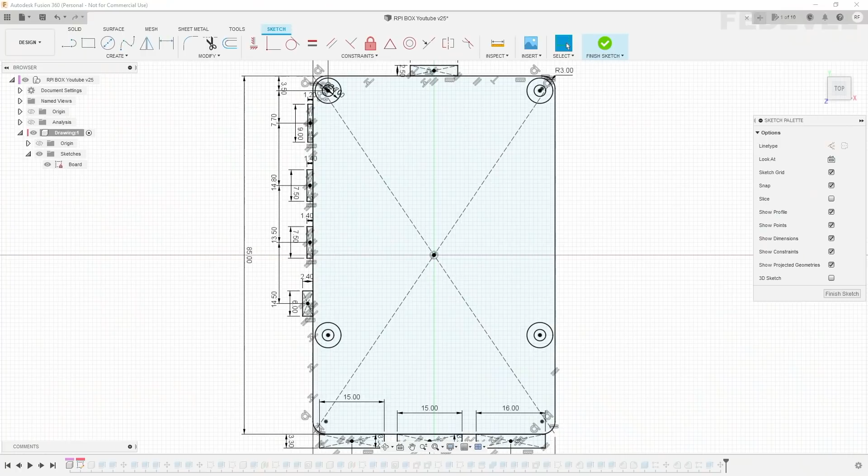After watching this video, you will know how to design and 3D print a box for your own board. As an example, we will be designing a box for a Raspberry Pi. First, we will create a drawing with board dimensions and connector positions. Then we will create a very simple 3D model of our board, and based on this model, we will create our box with openings for the connectors. At the end, we will 3D print the box and mount the board inside. I really hope you find it useful, and here is the video.

Before we start, we need to search for Raspberry Pi mechanical drawing so we can get the accurate position of the mounting holes and connectors. Then open Fusion 360, go to Inspect, and click on the component color cycling toggle. You don't have to do this, but I'm using it in the video, and basically what it does is assign different colors to different components we will be creating.

We are going to create a new component, right click, new component. I'm going to call it drawing. Now open the origin. Be sure the new drawing is selected - there has to be this dot.

Click on Create Sketch. Select X and Y, left click, go to Create, Rectangle, Center Rectangle, left click. Write the dimensions, 56, tap, 85, enter. I'm going to zoom and save our new project. Click on Save - I'm going to call it RPI Box YouTube.

Save. We are going to create rounded corners. Left click, left click, left click, 3. Left click several more times, enter.

We are going to add mounting holes. Left click on Create, Circle, Center. Left click somewhere here, write 2.7, enter. Use the Dimension tool, left click, click on Center, left click - this is supposed to be 3.5 millimeter, and from here to here we would like 3.5 millimeter. Create, circle, center, left click, write 6, enter.

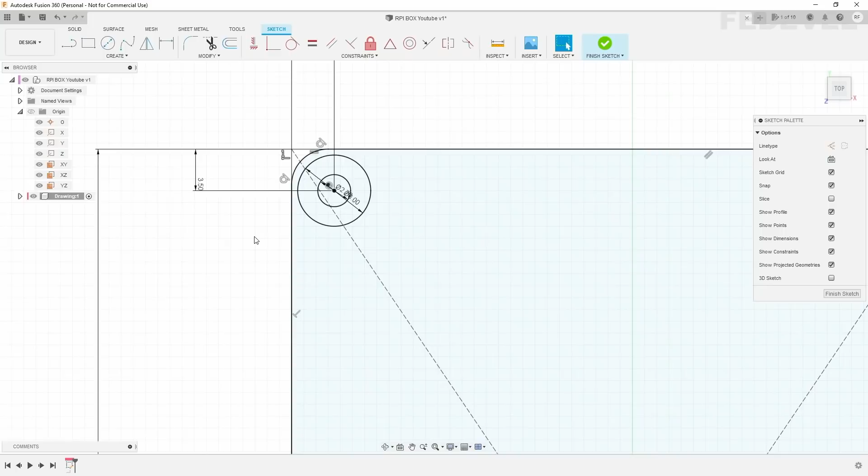Click on Create, rectangular pattern. Select the circles, left click, press Ctrl, left click. We would like to select directions, left click, press Ctrl, left click - now you can see these arrows pointing this way and this way. Select spacing - we would like 2 this direction and 2 this direction. Here is going to be 49 millimeters, and here is the distance 58 millimeters.

We are going to add information about the connectors. Click on Create, Rectangle, Center, Zoom, left click, write 15, tap, 3.3, enter. Create, Rectangle, Center - next one is going to be exactly the same, 15, tap, 3.3, enter. The last one is going to be a little different - write 16 by 3.3, enter.

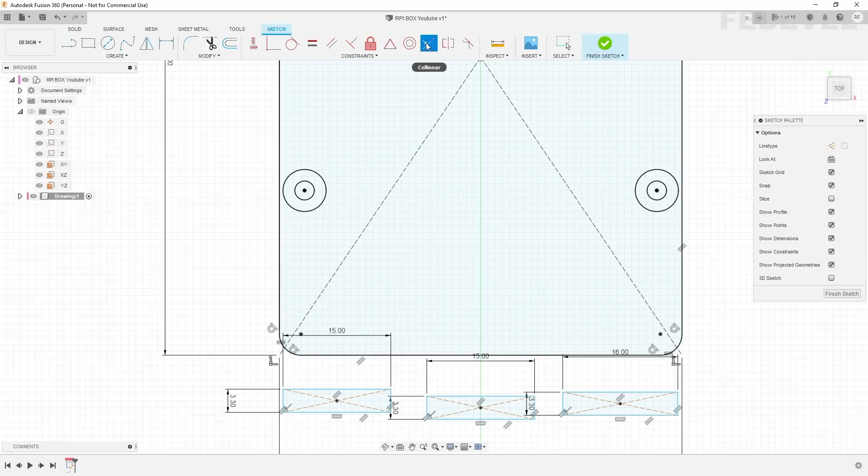Now we are going to use this collinear feature, left click - it will help us place this edge of these connectors on this line which is here. Once active, left click on this line and then left click on this edge. Line, edge. Use Dimension tool, click on the center, left click - this should be 9 millimeters. Left click, 9, enter.

From here to here, we would like to use 27. Left click, 27, enter. And the last one, from here to here, it's supposed to be 45.75, enter.

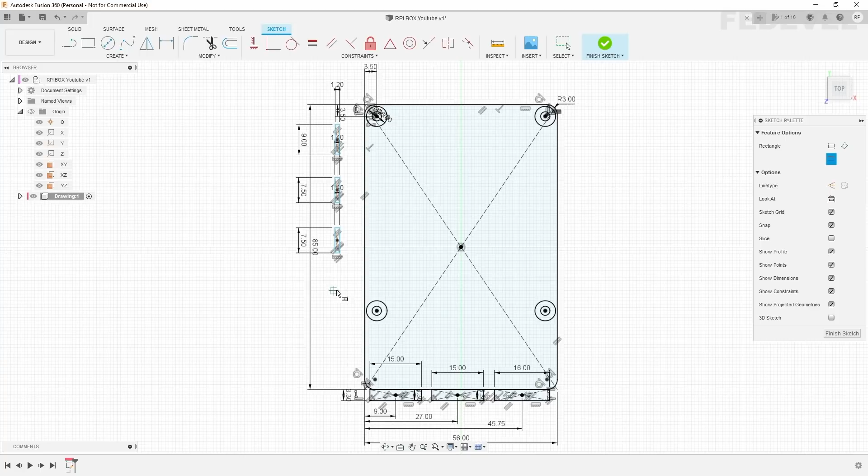We are going to add more connectors. Click on create, rectangle center, left click, 1.2 by 9. The next one is going to be 1.4 by 7.5. And the last one is 2.4 by 6. Use the collinear feature or constraint.

Left click several times to apply the collinear constraint, and use the dimension tool. From here to here, we would like 7.2. Left click, 7.2, enter. Now from here to here, there should be 14.8. From here to here, 13.5, and from here to here, we would like 14.5.

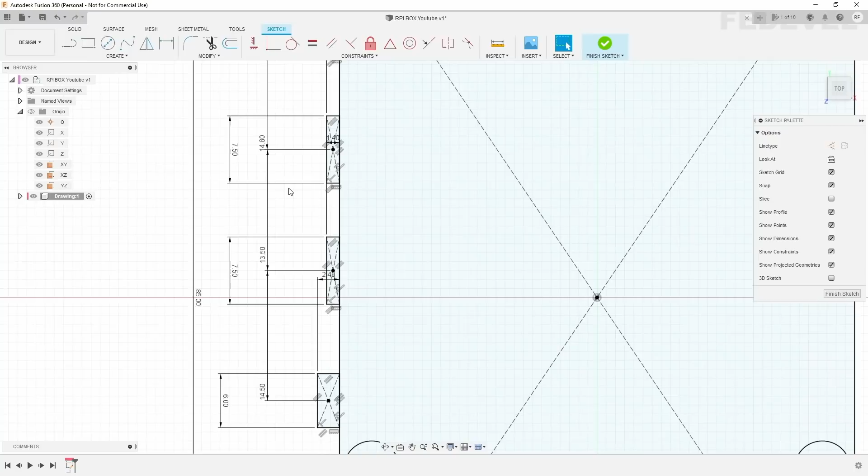Okay, escape. If you like, you can play with these dimensions and put them into nicer positions, but it's not really necessary - though it may look a little bit nicer.

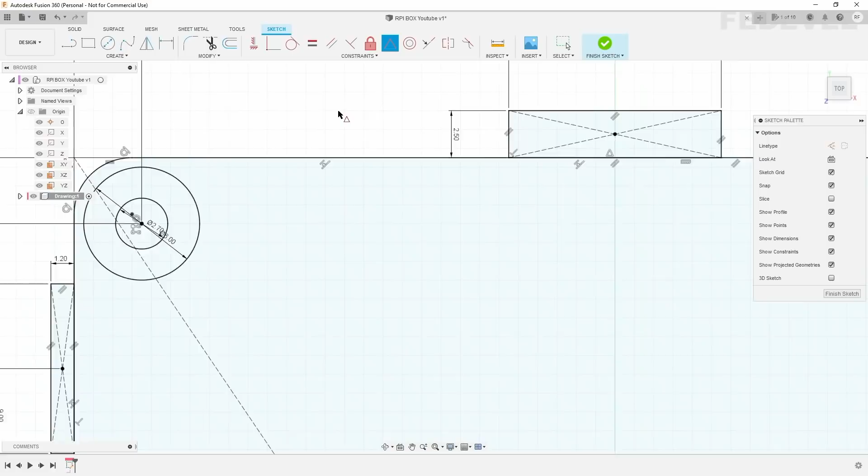And the last is the SD card. Create rectangle, left click, 11 by 2.5, enter. We would like to place this edge on the edge of the PCB, and also place it into the center of our board. So click on constraint, use midpoint - first be sure you highlight only the edge of the rectangle, left click. Now we would like to place the middle point of this rectangle into the middle point of this edge of the PCB - also left click on the edge of the PCB, escape, and our drawing is finished.

Click on finish sketch, save our project, create new component, call it board - we are going to create a very simple 3D model of our board. Be sure it is active - when it's not active, you can just hover the cursor over the component and left click into the circle. We are going to use the drawing to create our board, so left click - we would like to also select these circles, press Ctrl, left click, only leave the hole empty, okay?

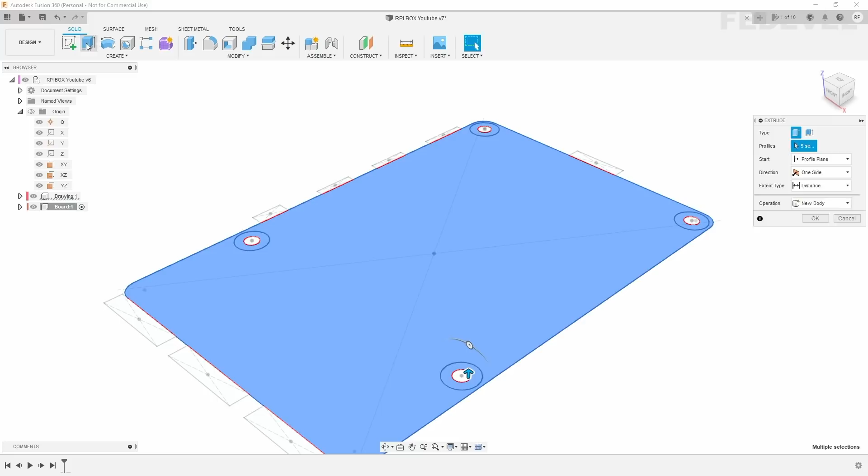Find where it is black, like this, and left click. Still press Ctrl, left click. Now use this extrude feature and simply write -1.5, enter.

Make the drawing visible. Go and select this, use extrude by 1 millimeter, use move command, select this and put it down by -3 millimeters. I'm going to call this SD. This is going to help us find where we need to create an opening in our enclosure for the SD card. And this I'm going to call PCB.

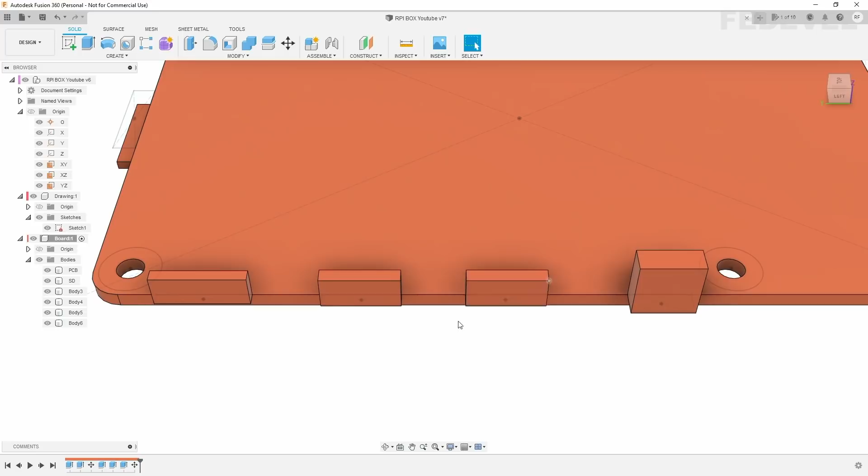We are going to do the same with the other connectors. Select 3, 4, 5, 6, use move command, and put it down by -0.1. I'm going to call this one USB.

This one is HDMI 1. HDMI 2, audio.

Very similar with these. Select, put it up, 15, select this one, 13.5, and move all of them up by 0.4 millimeter. I'm going to call this one USB 2. This one is going to be USB 3. And this one is Ethernet.

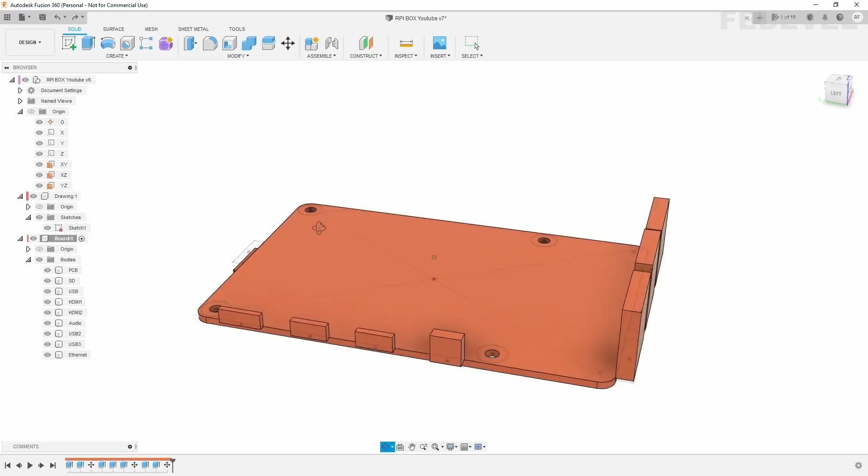Only what's left is to adjust the shape of the audio connector. Click on Sketch, left click on the surface, create project, left click on the square. We would like to project the edges of the square on our sketch so we can work with them. Circle, 3 tangent circle, left click, we would like to draw a circle inside of these 3 lines. Finish sketch. Now left click, press Ctrl, left.

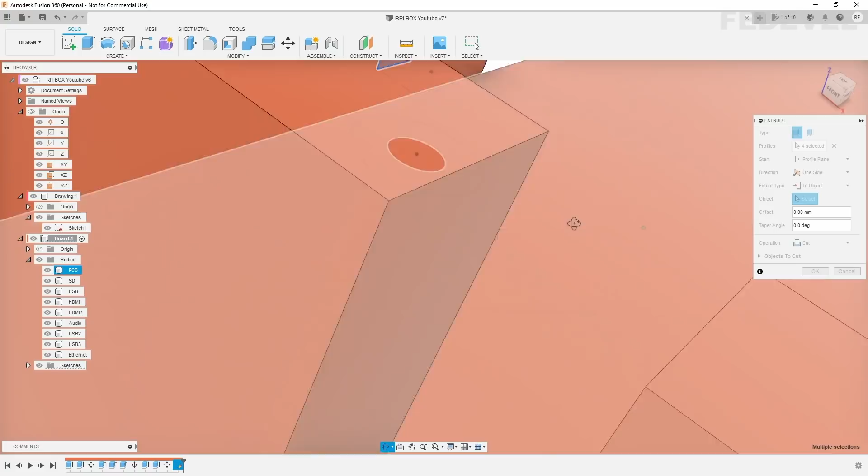Extrude, cut, up to the end of this object. Okay, perfect. Don't forget to save your project, and our board is finished.

Make the drawing active, rename this, create new sketch. I'm going to call it walls, and we are going to use the project feature to put there the board outline.

Just hover cursor here and double click, and we would like to also project on our new sketch the position of these holes. Okay, hide the board and also the board sketch. Now select the board outline, just left click, press Ctrl, left.

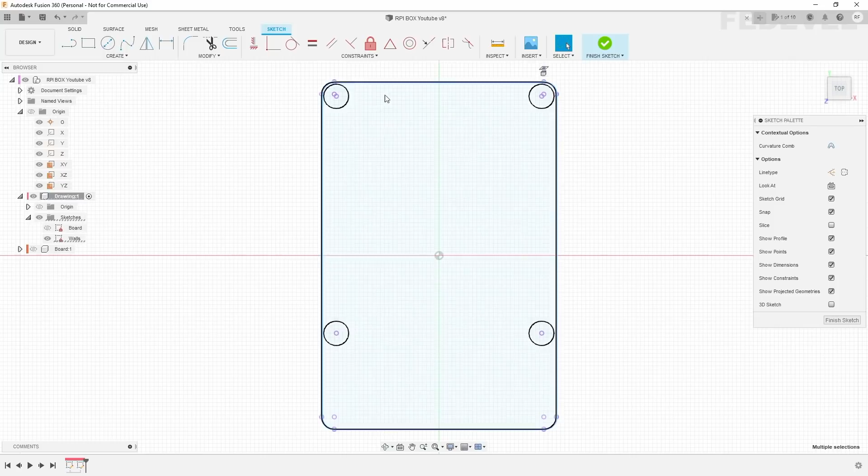Click on this offset feature, use 2.5, enter, and do it one more time. Left click, Ctrl, left, select the board outline, use the offset feature and write 0.5, enter.

Finish this sketch, create new component, right click, new component, call it box bottom. Okay, be sure it is active.

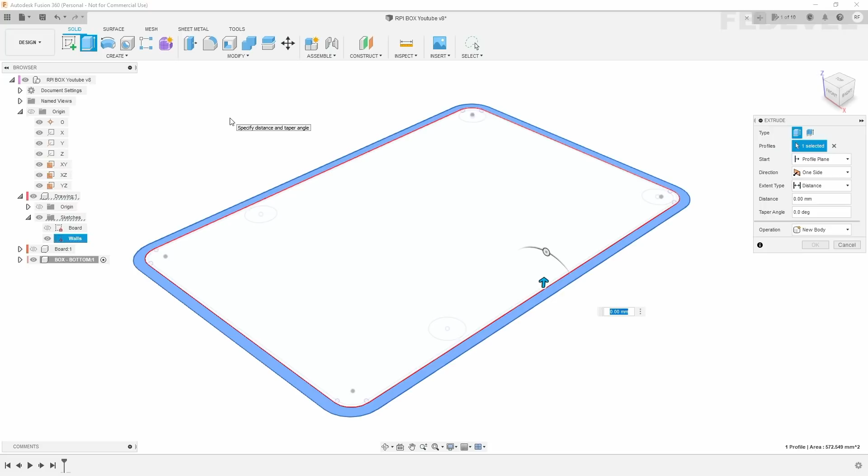Now select this frame, extrude -5, enter, click on construct, offset plane, select this bottom of the frame and put here 2, enter. We are going to create a new sketch on the plane we have just created.

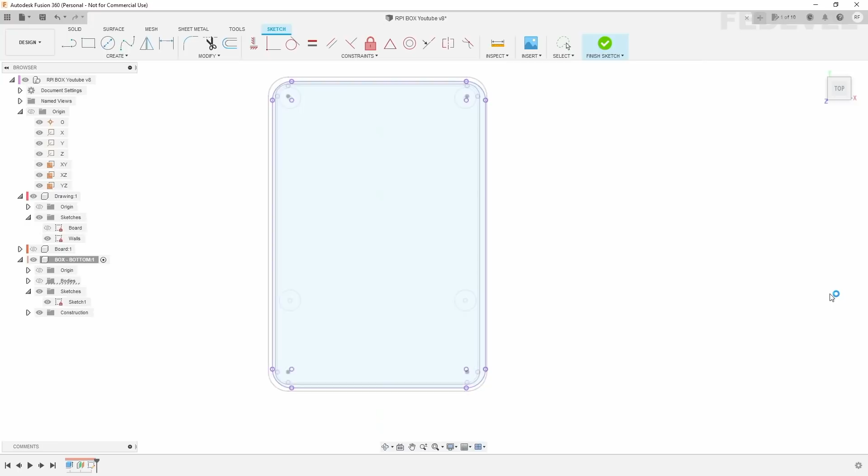Now click on create, use the project feature, enable walls, hide the bodies, and we would like to project the outline of our box, so just double click here, okay, finish, hide the walls. This is our new sketch, select it.

Extrude, and we would like to extrude this bottom of our box up to the bottom of the frame. So select this, join, okay, perfect.

We would like to edit our sketch, so just double click here, use the project feature again. I'm going to hide the walls, hide the bodies, enable the walls.

We would like to add on our sketch also these circles. Okay, finish sketch, disable walls, enable our sketch.

Now select only these circles like this. Press Ctrl, select all 4, click on extrude. We would like to join this with the existing body which is here, and I'm going to hide it for now because I would like to see the bottom of our board.

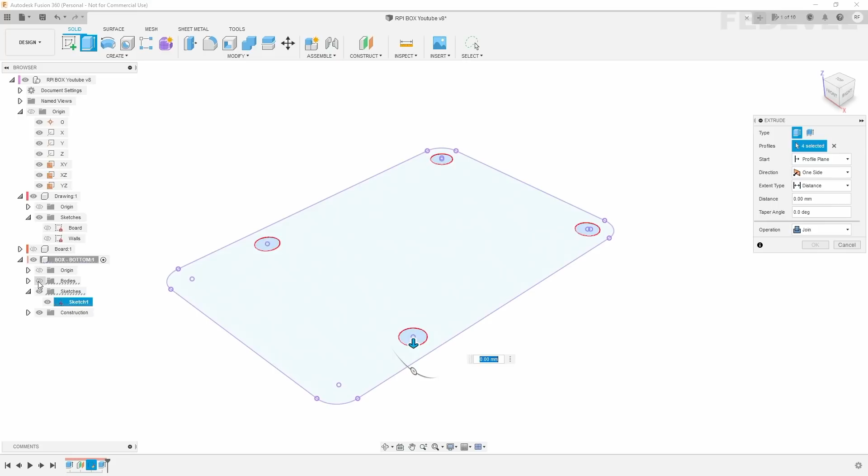So we would like to extrude these circles up to the bottom of our PCB. Okay, be sure it is selected as join. Okay, now we can hide the board and enable the bottom part of our box, and it should look like this.

We are going to add holes, so let's have a look at the bottom of our box. Use this hole feature, select multiple holes, press left click on this first hole, then Ctrl, left click on the middle of this circle, not this one, okay, but this one, left click, select all 4, and we would like to use this one, and this one.

This dimension is going to be 6 millimeters, this one is going to be 60 degrees, and this one is 2.8.

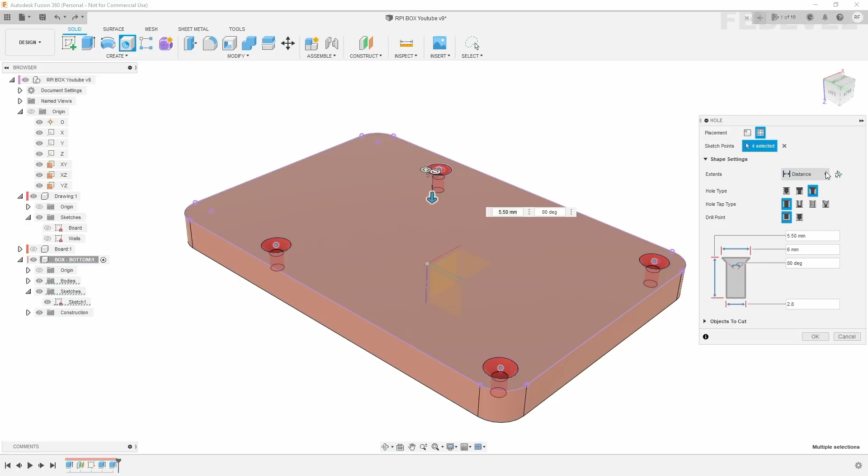And we would like to make the length up to this end of this standoff. So just select this, left click, and press OK.

Okay, this is exactly what we would like to have. Make the drawing active, hide the sketch, and enable walls. We would like to edit this walls sketch, so just double click here.

Select the outline of our PCB. We are going to make the guide on the edge of our box, so the top and bottom part of our box can align correctly. Once the board is selected, use this offset feature, put here 1.6. Finish this sketch.

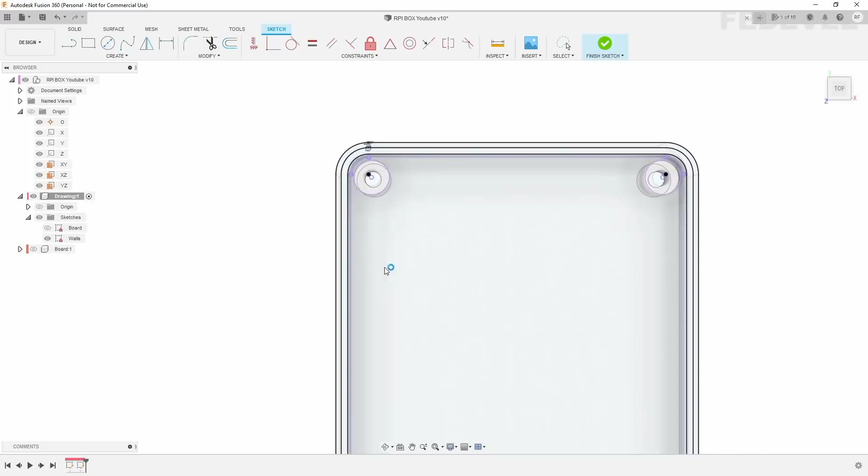Make the bottom part of our box active. Now select the frame we have just created and pull this down using extrude, put here -1.5 millimeters. Be sure the operation is cut.

Okay, I'm going to disable walls. This is basically the guide which is going to make sure that top and bottom part of our box is aligned correctly. We are going to create a new component, right click, new component, and I'm going to call it box top.

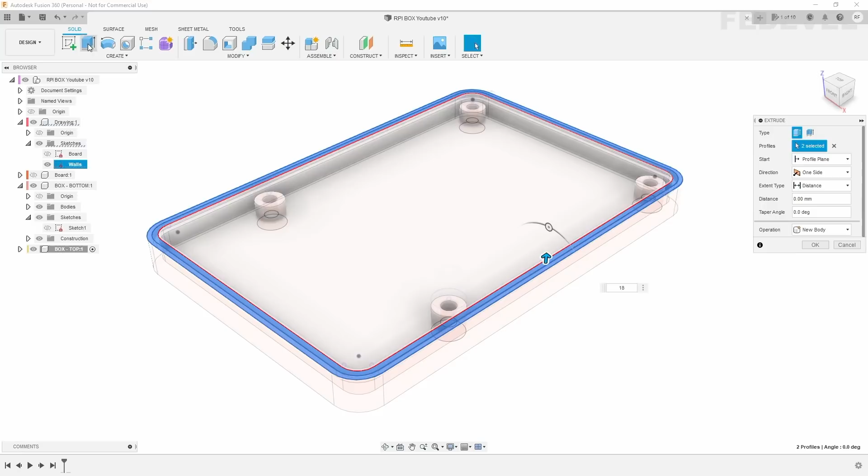We are going to create the walls, so be sure the top box is active, enable the walls, and select the frame, left click, control left click, use the extrude, and the height is going to be 18 millimeters. New body, okay.

We are going to add offset plane, left click offset plane, select top of the frame, add 2 millimeters. We are going to create a sketch on this new plane. Now hide the bodies and also hide the bottom part of our box.

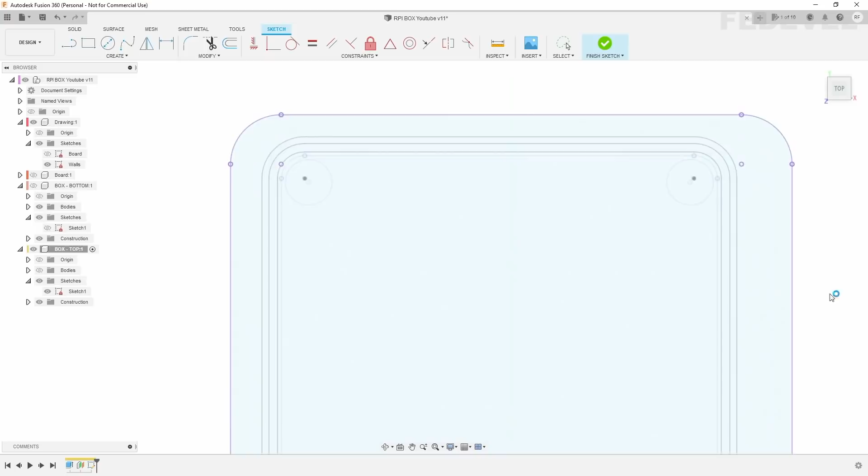We are going to project the outside of our box, just double click, okay, finish sketch, hide the walls, select the sketch we just created, use extrude, enable the bodies, and we would like to extrude up to the top of the frame. Be sure operation is join. This is the basic top part of our box.

We are going to add support for the screws, so I'm going to disable this and enable our board. Now left click, press Ctrl, left click, select all the 4 holes, use extrude, operation join, and we would like to join it with the top part of our box.

We would like to disable this because I can't select the bottom of the box, so I'm going to disable it, and distance is up to this. Okay.

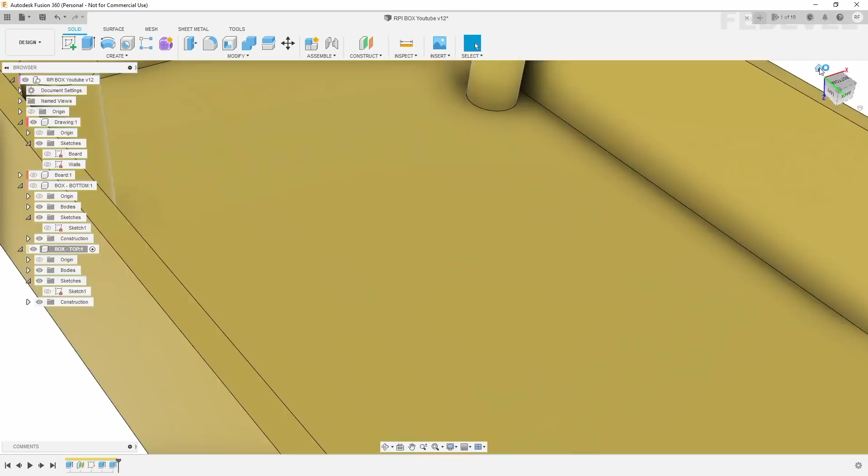Also we would like to add the holes. I'm going to have a look at the bottom part of our box. Use the hole feature, multiple holes, enable the board sketch, left click. Ignore this error because it's trying to make hole up, but we will be doing it down.

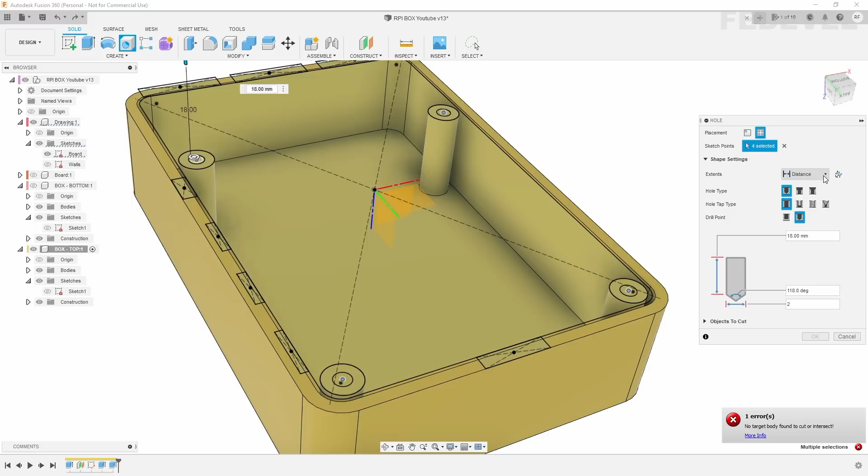Press Ctrl, left click, left click, left click. We would like to use this one, and this one, 118, 2 millimeters. And we would like to use these two. Now disable this sketch, so we can left click on the bottom of our box, like this.

And yeah, this is going to be fine. You can see the hole here. Okay.

Perfect. Make the drawing active. Make walls visible. We are going to edit the walls, so double click on this sketch. I'm going to select the outline of our PCB.

Because we are going to create the guide in the top part of our box, once it is selected, use the offset feature and put here 1.4. Okay, finish sketch.

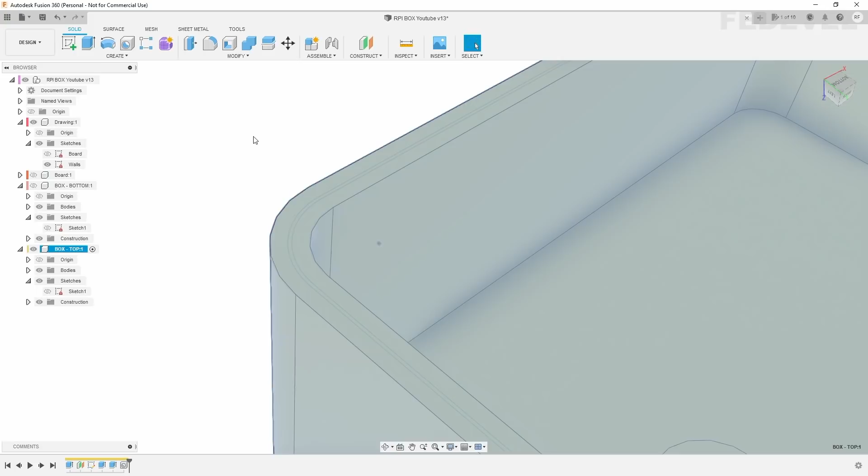Now make the top part of our box active, and select the part of the frame we have just created, this one. Left click, extrude and use -1 millimeter. Operation join. Okay, see, this is what we have created.

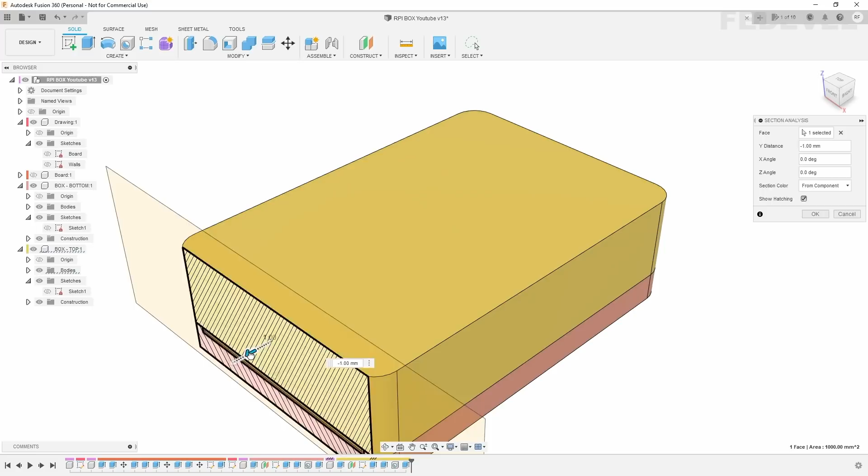We are going to double check how it all looks. So I'm going to make the whole project active and make everything visible, top and bottom part. Now in inspect, select section analysis and select, for example, this side of our box. Here you will be able to see what is inside.

So what we can do, we can move it maybe like this. And here you can see these are the guides, top and bottom guide, they look okay. These are the holes, they look okay. And here is the space for the PCB.

Okay, so if you like, you can always enable and disable this analysis here. I'm going to disable it and we are going to continue.

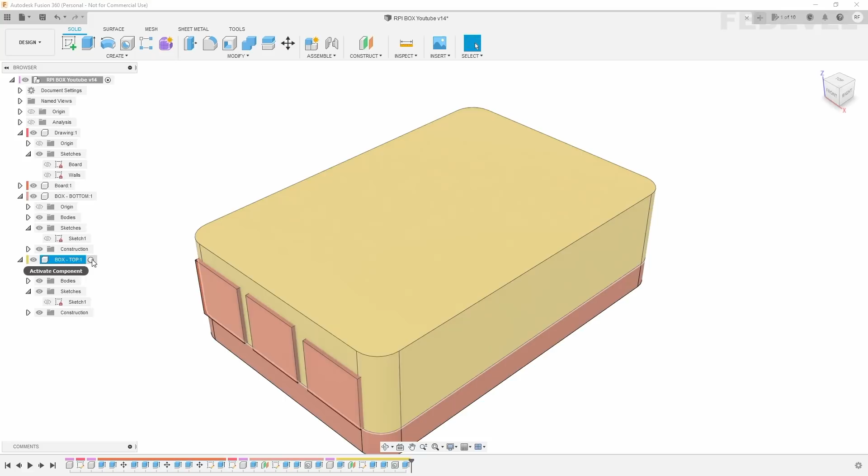I'm going to enable the board and we are going to make the box a little bit longer so the connectors are aligned with the box. So what I'm going to do, I'm going to make the top active. I'm going to use this feature called offset face, this one, and I'm going to offset it by 1 millimeter.

Enter. Make the bottom active. And again, modify, offset, 1 millimeter. When we enable everything again, now you can see the connectors are hidden in the box.

We are going to create the holes for the connector. So I'm going to make this top part of the box active. I'm going to create a sketch on this side of the box. I'm going to hide these bodies and also the bottom part of the box.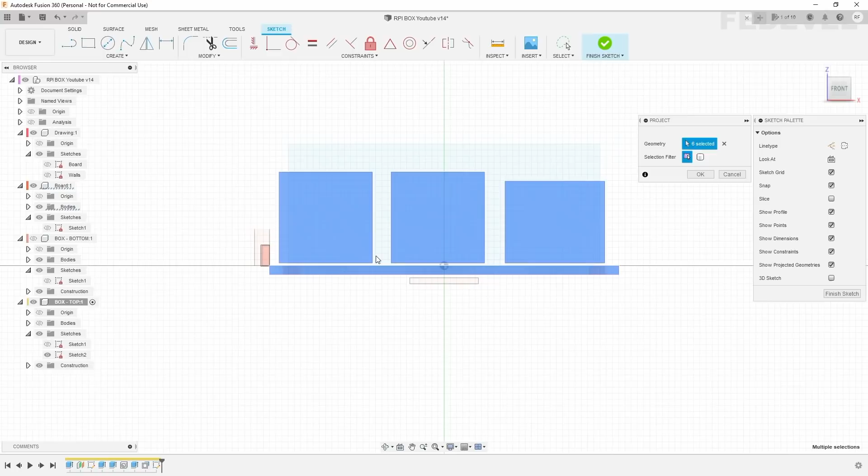I'm going to use the project feature, left click, control, left, left, left, left, left. Okay, now I'm going to use some construction lines. These are like not real lines. I'm going to use them only to help me draw the openings for the connectors.

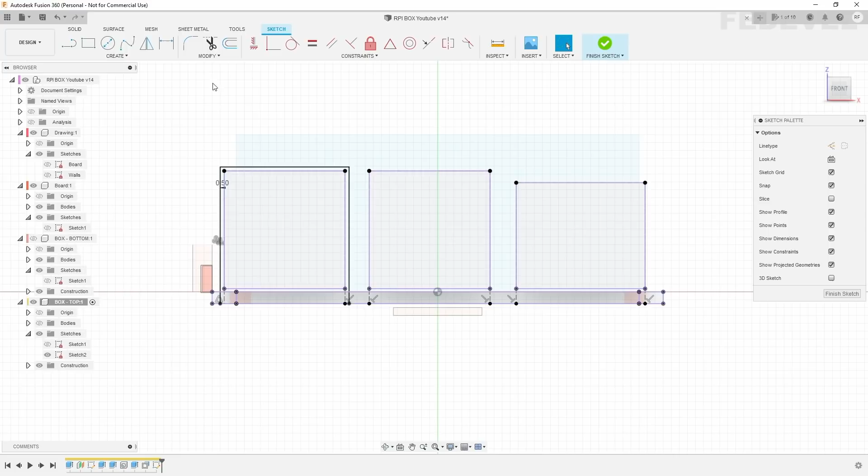I will use these lines to create the offset. Turn them off. Now use the offset tool, left click, 0.5, enter, offset, 0.5, enter, offset, 0.5, enter, finish sketch.

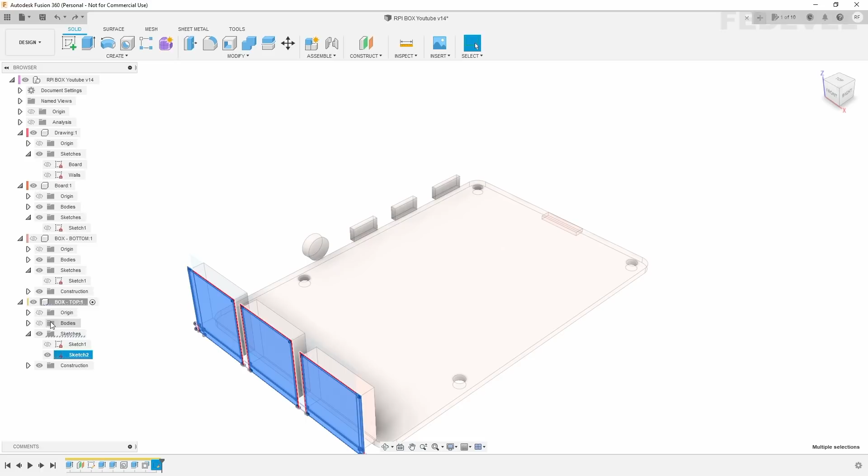We are going to select these holes, so I'm going to use this filter and only check the sketch profiles. Now front, press shift and hold it down. Okay, enable bodies, hide the board because we really don't want to cut the holes in the board, so be sure everything else is hidden.

I'm going to use extrude, up to. We don't want to do it up to this point because here are these rounded edges. We also need to cut here, so I'm going to do it up to this point, which is here. Be sure there is the cut operation, that's what will make the holes in the enclosure. And it looks perfectly fine.

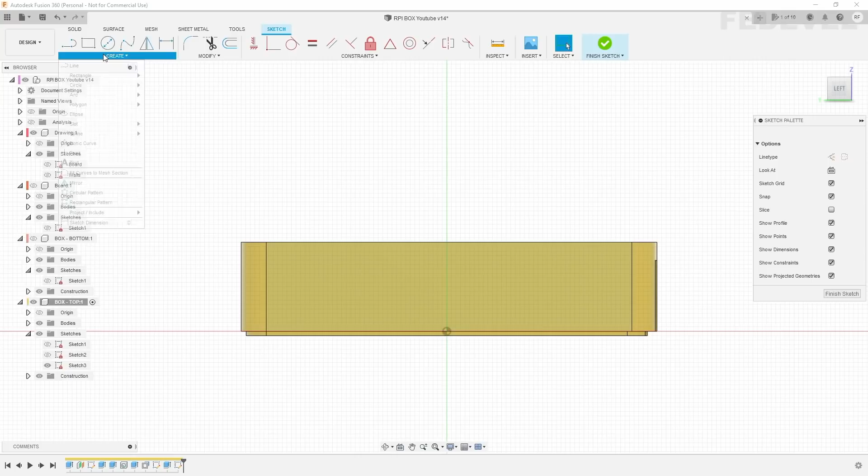We are going to make these openings also on this side of the enclosure, so I'm going to create a sketch on the side. I'm going to use the project feature, hide bodies, enable the board, left click, control, left, left, left, left click. Okay.

Now construction line, left click, left, left, left, and also here.

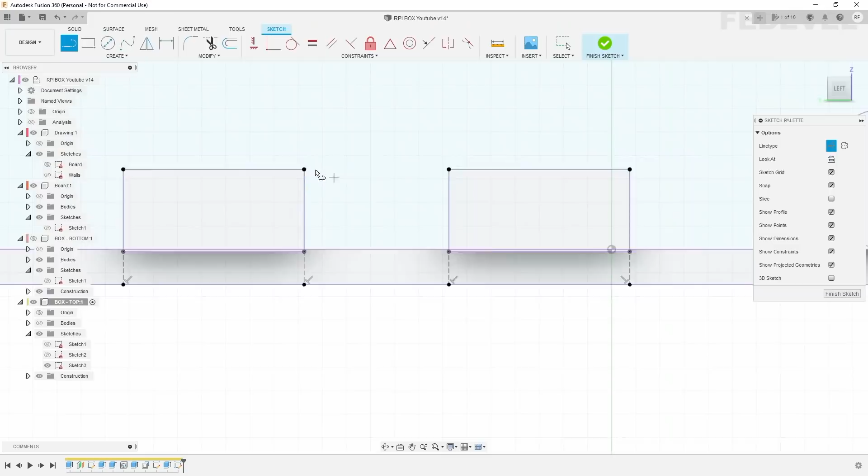Okay, disable construction lines, use the offset feature, control left, left, minus 0.2, minus 0.2, minus 0.2. Okay, make offset also here, 0.2.

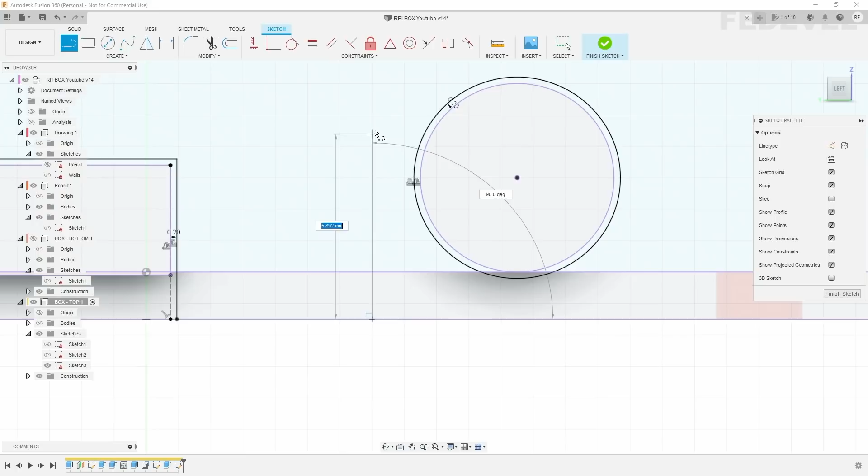And here I would like to also draw lines like this. Escape. And tangent this with this, tangent, and also this one - I don't remember. Yes. Finish sketch.

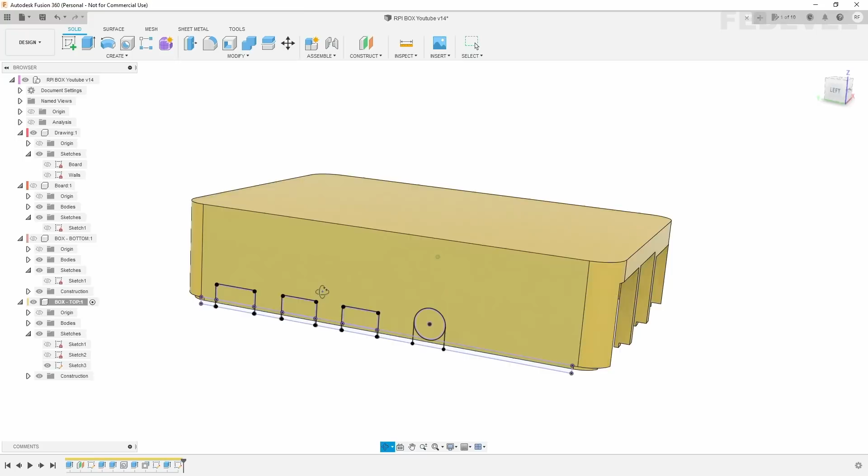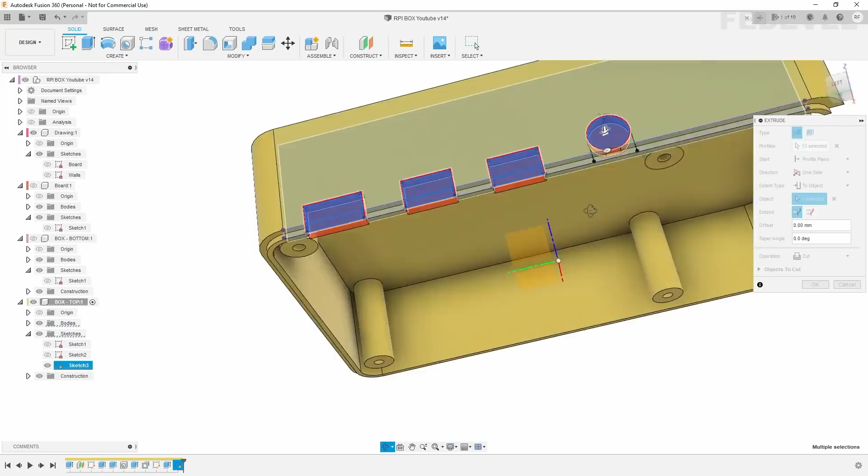And we are going to make the holes. Hide the board, enable bodies, still be sure our selection is filtered and only for sketch profiles. Now I'm going to do it like this. Press Shift, hold it down, select also this, and also this one, and this one. Use the extrude, cut, and distance up to the backside of our enclosure.

We can't really manufacture this hole which is here, so what I'm going to do is edit this sketch. Double click here. I'm going to name it so I know this is the side sketch. And what I'm going to do is draw a line between this and this point. Escape. Finish this sketch.

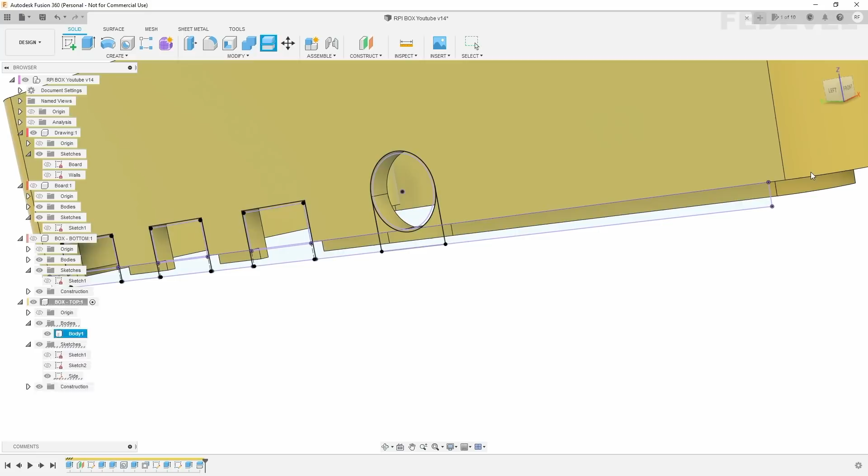Now use this split body tool. We would like to split the top part of our box, and as splitting tools, left click, we would like to use this sketch, enable it, and we would like to use these lines which are here. Be sure this extend splitting tools is unchecked, and watch what is going to happen here. We are going to have two bodies - the first body is this small part of the box, and this is the big part of the box.

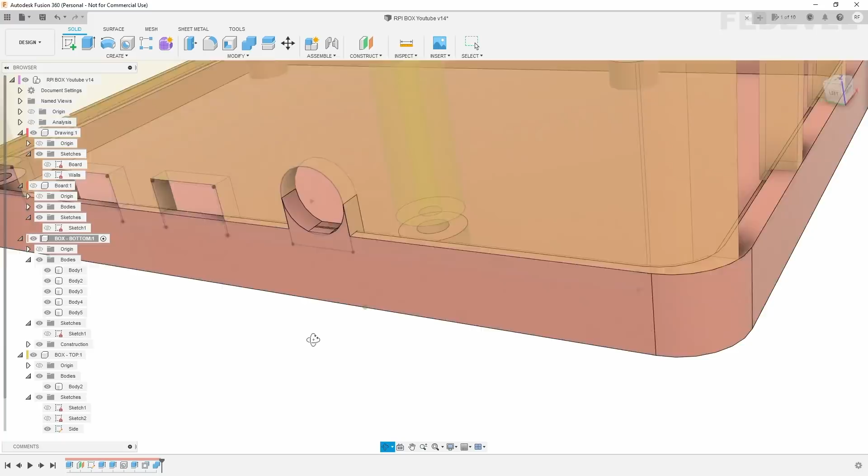Make the bottom part of our box active, and we are going to combine our bottom part of the box together with this small part which we just cut out from the top part of the box. Operation join, and this needs to be unchecked. Okay, so I'm going to make this visible, and now you can see our bottom part of the box has this part, and it's going to be easier to manufacture the box now.

I'm going to disable the top part of our box, and we are going to make some small adjustments. So I'm going to use this extrude feature from here up to this. Okay, and I'm going to extrude from here up to this.

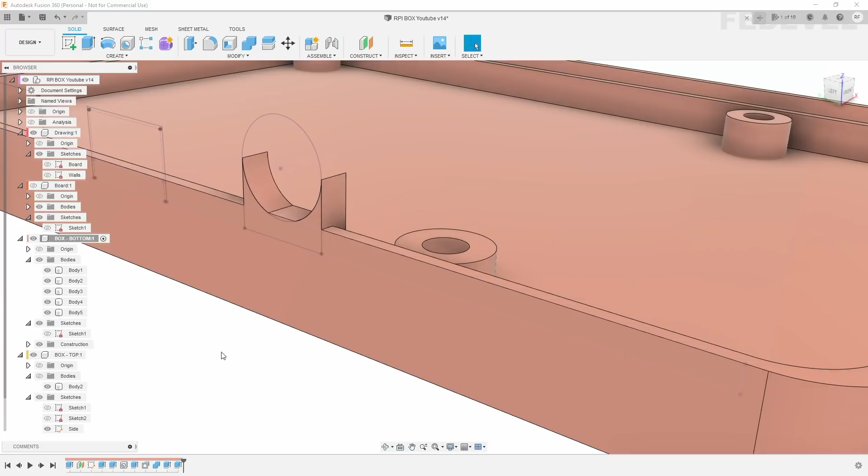We still would like to fix this, what is here. So I'm going to enable the top box, but disable the bodies. I just would like to see the sketch. So I can select this, use extrude up to the other side here. Okay, perfect.

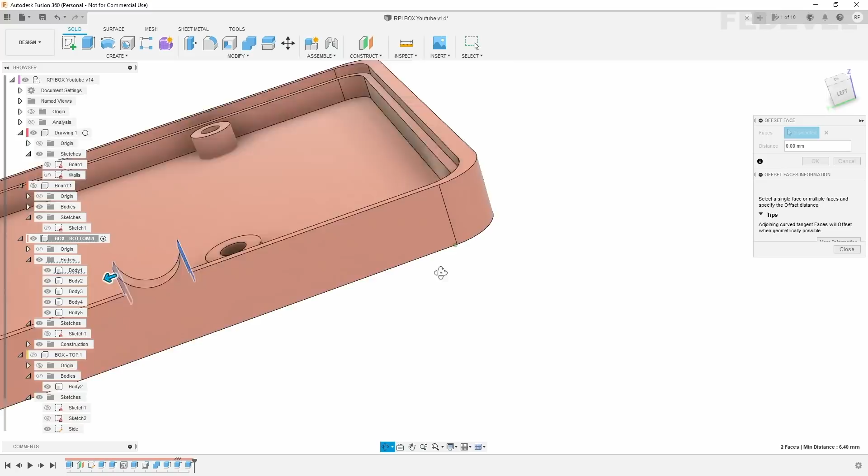The last thing we have to do about this is to make it a little bit smaller so it fits perfectly fine into the top part of the enclosure. So modify offset faces, select this one, press Ctrl, select also this one, and make them like minus 0.2 millimeter. Press OK. Now if we enable the top part of the box, you can see there is a little bit of tolerance between the two parts, so it can fit very nicely.

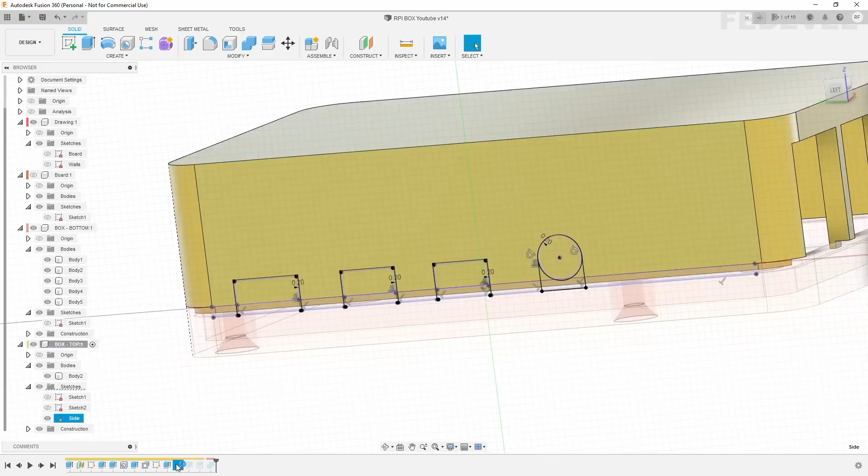We are going to make some small adjustments also in these areas where the connectors are. So I'm going to make this top active because I would like to make some small changes in this sketch. Double click. I'm going to use the construction line, and connect it like this, here and here, and also draw this construction line here. So these lines are basically telling us where the bottom of the connector is, and then we will make the offset from these lines.

Offsets is basically the tolerance, how much bigger we would like to have the opening. I'm going to disable the construction line. Now use the offset tool and select it, be sure also this is selected. And we would like to make it 0.2 millimeter.

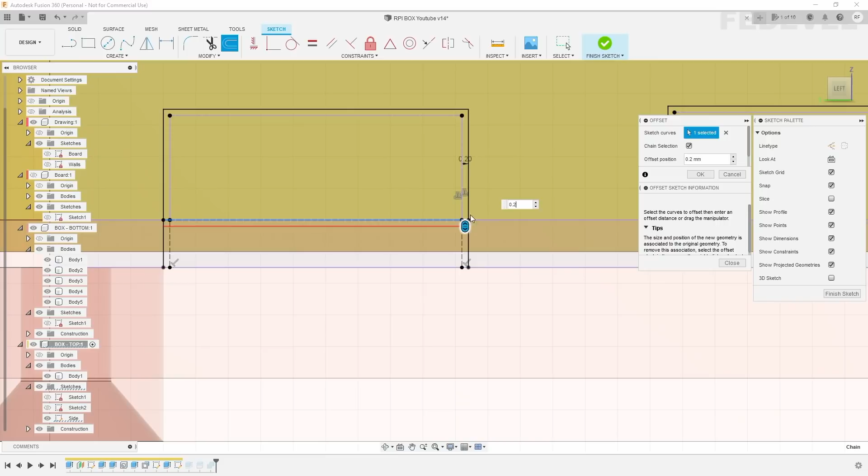See, so the opening is going to be 0.2 millimeter bigger than the size of the connector. Enter, and do exactly the same here. Offset, left click, control left click, also this, 0.2, and offset, minus 0.2, so it is below this line. Enter.

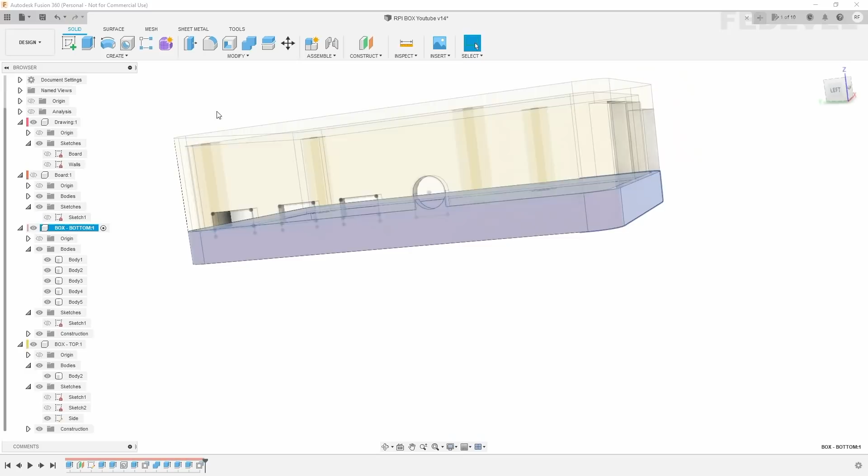Okay, finish sketch. Now make the bottom part of our box active, because that's where we would like to make the changes. Now simply select all these small parts of the enclosure which we would like to cut out.

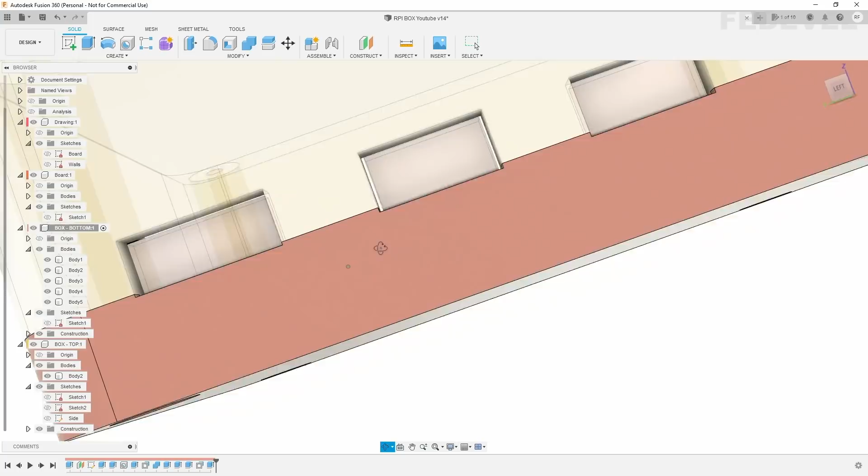And use the extrude up to the other side. I'm going to hide this. Be sure cut is selected. Okay. So if I enable the enclosure, disable this side, and enable the board, now you can see that there is 0.2 millimeter around all the connectors everywhere, including the bottom side of our box.

Okay. There is one more opening which we would like to make on this back side of the bottom part of our box. So be sure bottom box is active. Click on New Sketch. Left click on this back side. We are going to use the project feature. We would like to see where the SD card is located.

Okay, now use the construction line from here to here, and also from here to here. Escape, switch it off. Now use the offset and left click. If you can't left click here, then uncheck this chain selection and left click, left click, left click, left click.

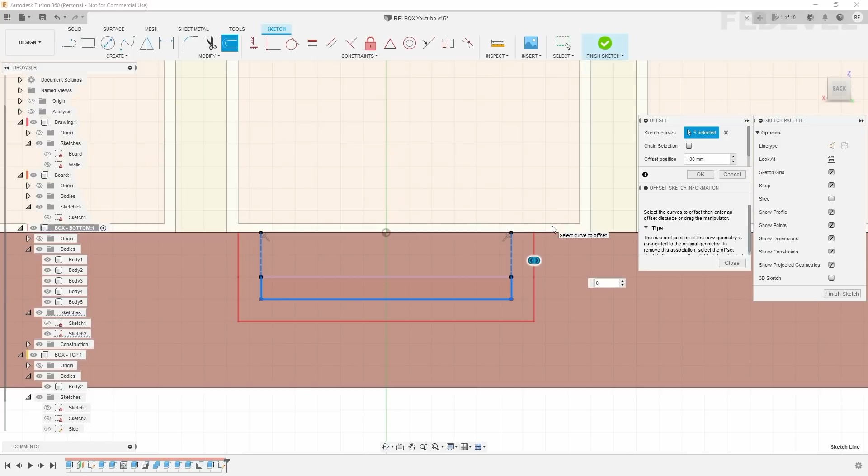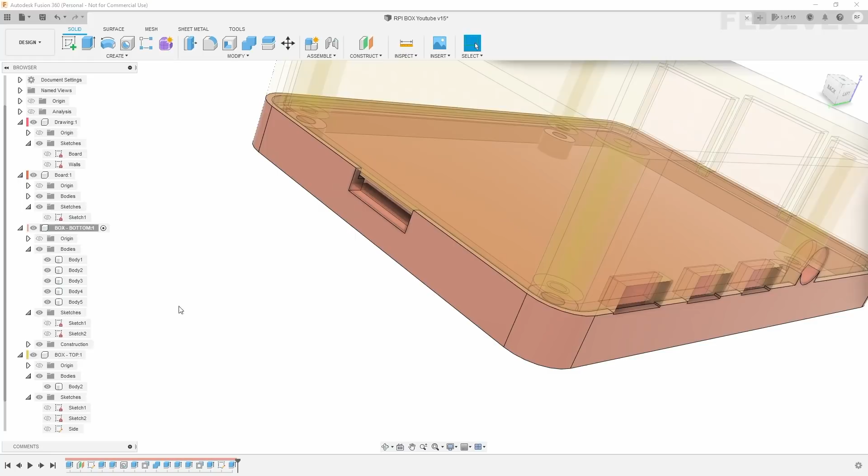And change this to 0.2. Enter. Finish sketch. Now select this, left click, control left click, use the extrude up to. I'm going to disable this top and also disable the board. We would like to do the extrusion up to this. Okay. Now enable the board, enable the top part of our box, and double check if everything looks okay.

Now what we could do, we could also make something like this. Use this modify chamfer, select this edge, and put here like 1.5 millimeter. So it's easier to remove the SD card. Enter. Perfect.

We are going to make more adjustments on the top part of our box. So make it active, hide the bottom part and also the board. We would like to edit the sketch which is on the top of our box. So double click here. We can hide the bodies.

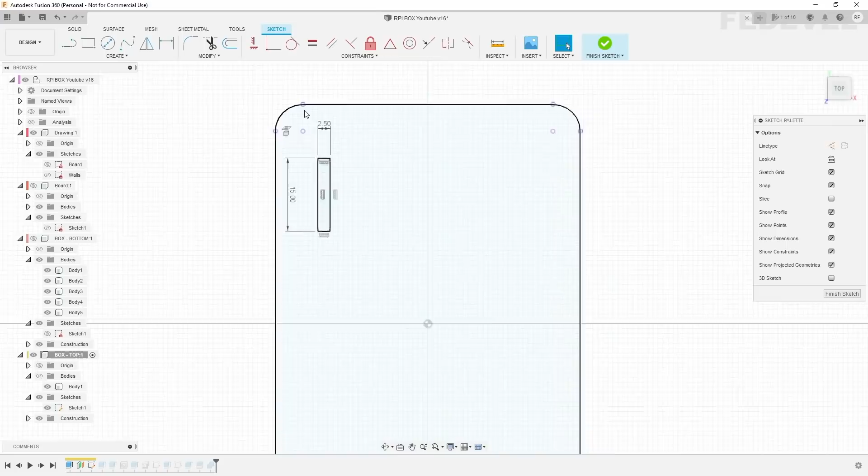Now create rectangle, 2 point, left click, put here 2.5, tap 15, enter. And we would like to place it 10 millimeters from the top, and we would like to place it 23.75 millimeters from the middle.

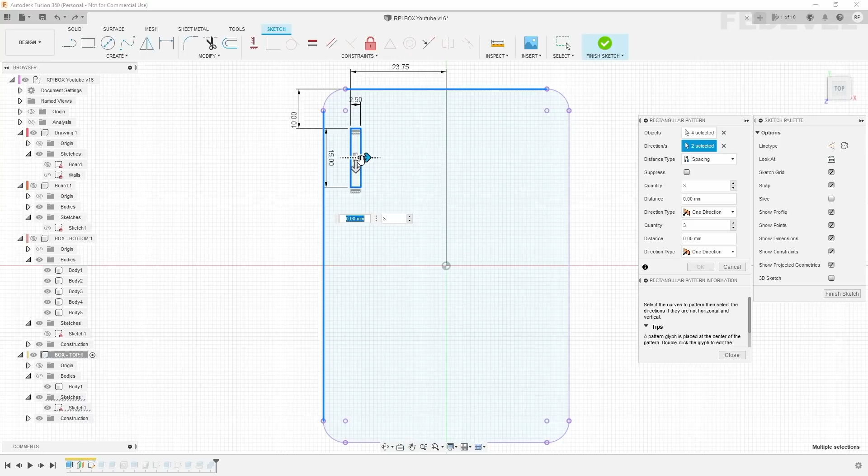Click on Create Rectangular Pattern. Now select the object, so just double click here. Directions, left click, left click, left click, so the arrows go this way and this way. Now quantity 10, distance 5, and quantity 3 and distance 17.5. Okay. Finish the sketch.

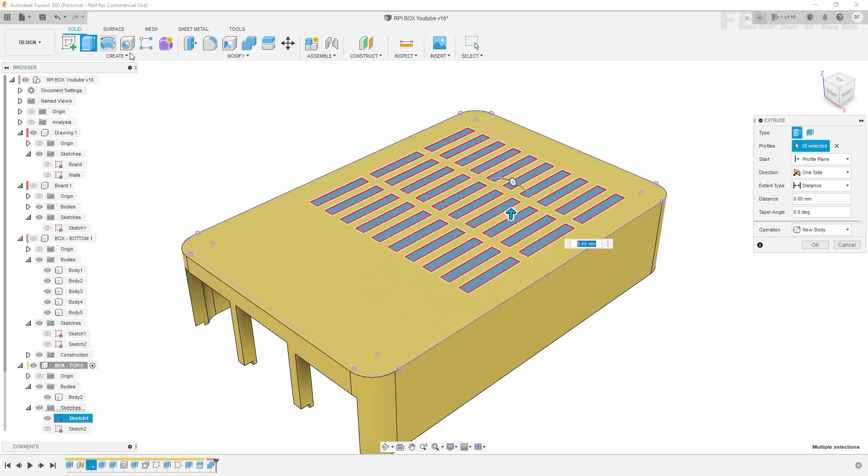Enable the sketch, not this one, but this one. Make it visible. And select all these. You can do it one by one, or what we can do, we can just draw a rectangle. Use the extrude and up to the bottom of our board. Cut. Okay.

We are going to add some text on the top of our box. So we would like to edit this sketch. Just right click, edit sketch, create text, and maybe from this point, maybe like this. I'm going to put here Fedevel. You can put there your company name or your name. Arial Black 7, center and top. Okay. Perfect. Finish sketch.

Select this text. Oh, I need to go into my selection filters, enable everything. So select the text, extrude, and minus 1, enter.

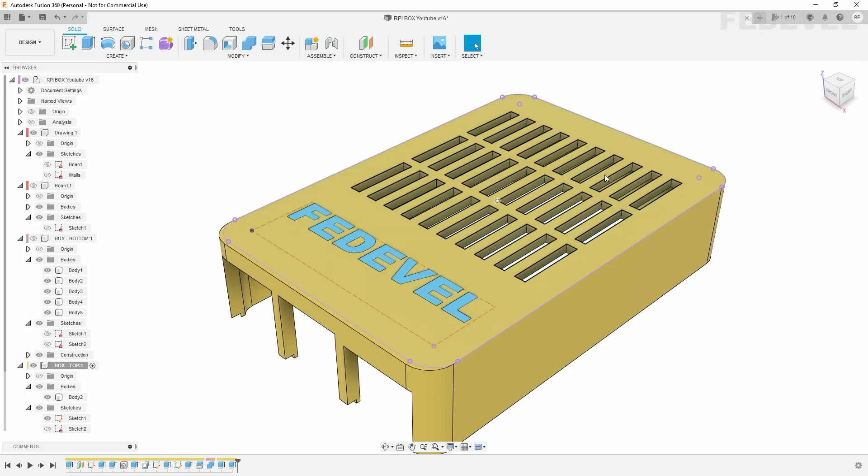We are going to make small adjustment here where the SD card is located. So I'm going to make this drawing active, enable walls, disable top box, right click, edit sketch. I would like to see where the SD card is located. Use the project feature and select the edges of the SD card. Just left click and left click. Okay, finish sketch.

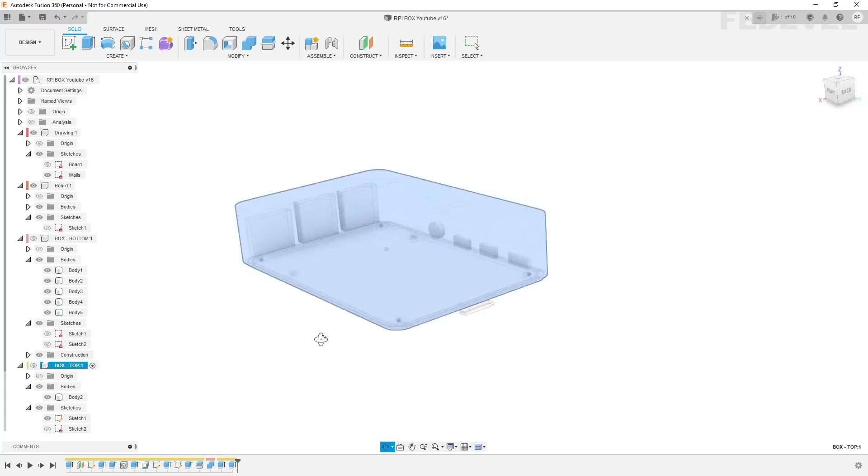Now make the top box active. I'm going to hide the bodies so we can see. I'm going to hide also the board so we can see this sketch. Left click, control left, oops, left, okay, and we would like to use the extrude, join.

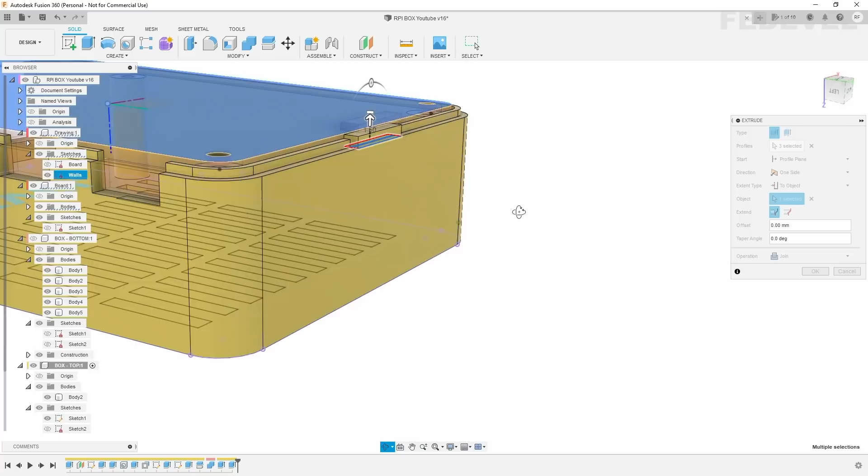I'm going to make it visible. Okay, and we would like to extrude this up to the top of our board, bottom of the PCB, like this. So distance to object here. Okay, perfect. This is exactly what we would like to do.

Okay, I'm going to hide the board. And we can also do modify chamfer, select this, 1.5, enter. So if I enable the bottom, this is how it looks. And when I enable the PCB, then this is what we just made.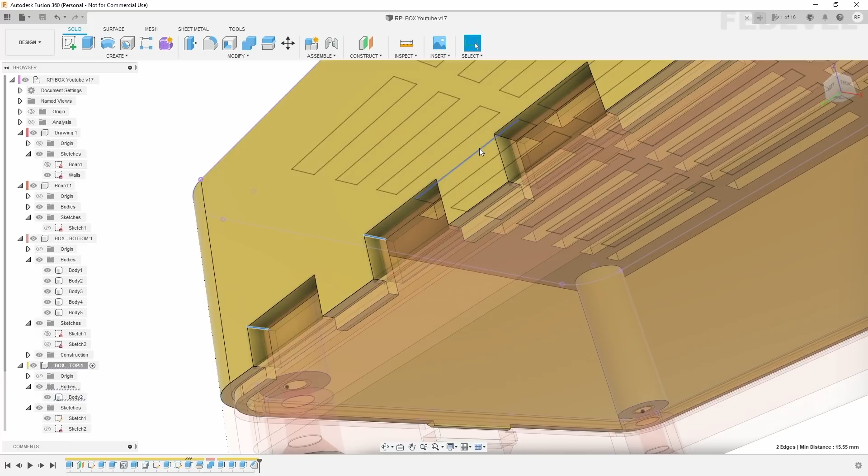Another small detail, I'm going to select all these corners and make them rounded. Why not? Click on modify, fillet, and use 1 millimeter, enter. See, it's a little bit nicer.

When I 3D printed this box, the board was too visible through the ribs, so I decided to improve it to something like this. Let's create a special pattern down here.

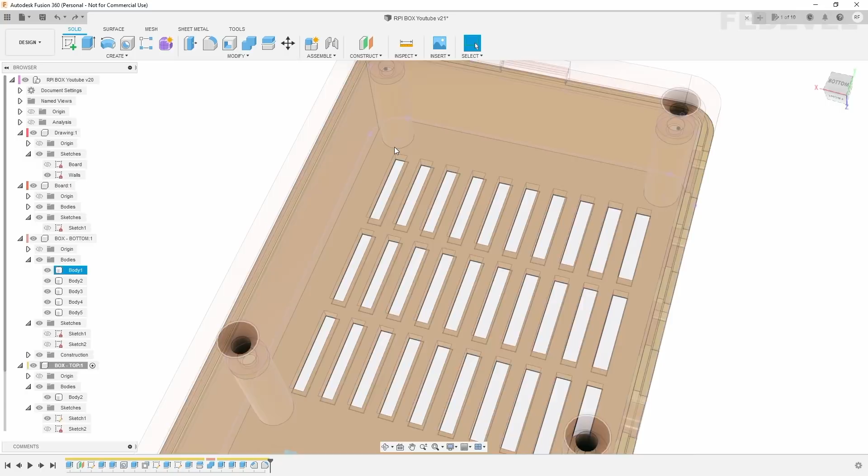First, I'm going to disable the bottom box drawing and sketches. Create a box on this plane, left click. Now we would like to start drawing here: 5 by 2.5, enter, and the height is going to be 2.5, enter.

Click on create, pattern, rectangular. Be sure bodies are selected here, select this object, select directions, this way and this way. For spacing and quantity, put 1 here, and down here put 6, with distance 2.5.

Now use the move command. Again we would like to move bodies, selection, left click, left click, left click, and move it like this. Adjust the distance to 2.5, enter.

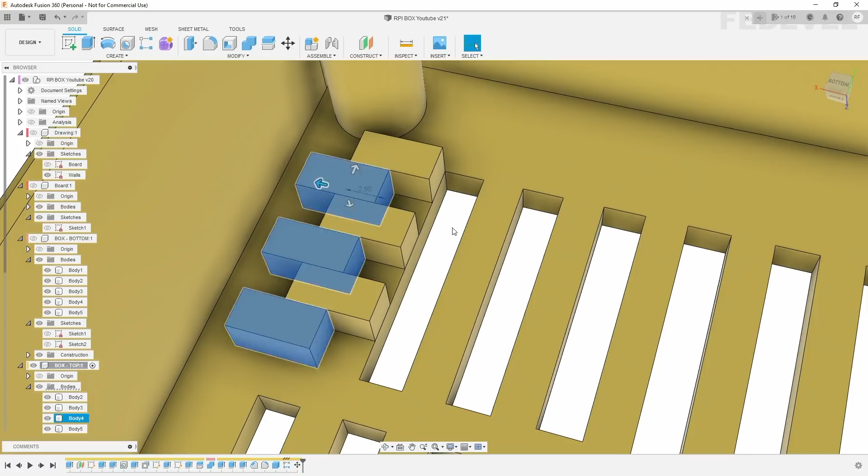We are going to make the openings here, so I'm going to use this modify chamfer feature and select this, and this, and also select this, and this. 2.5.

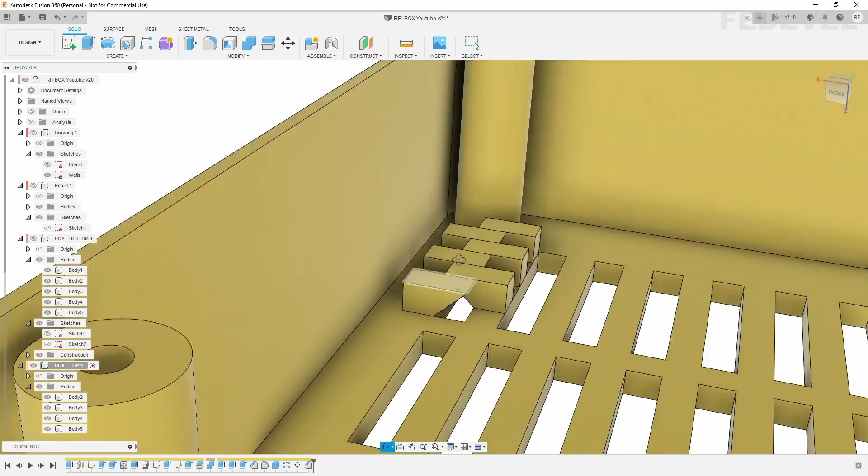Okay, now we have the openings, and I'm going to make it a little bit nicer. So modify chamfer again, select this, this, and this. 2.5. Press OK.

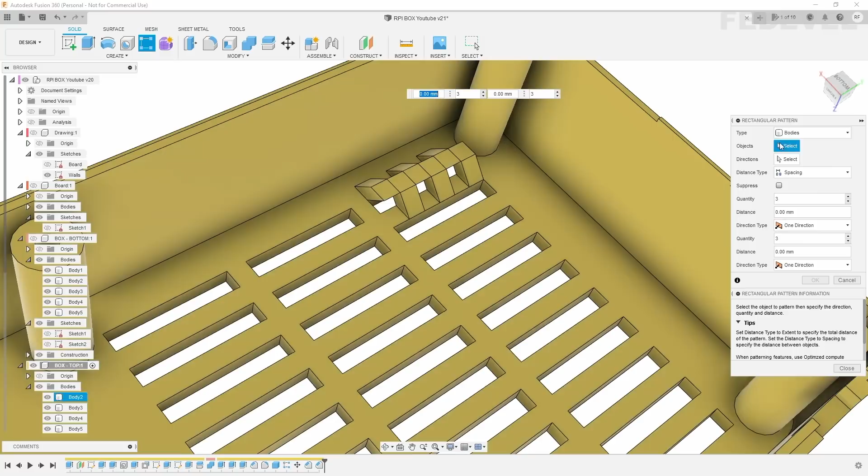Everything we have to do now is replicate this on all these other ribs, so we are going to use the create pattern, rectangular pattern feature. We are going to work with bodies and select them.

Now, for spacing and directions, this way and this way. This way we would like to have 10, and the distance is going to be 5 millimeters. And this way we would like to have 3, and the distance is going to be 17.5. Okay.

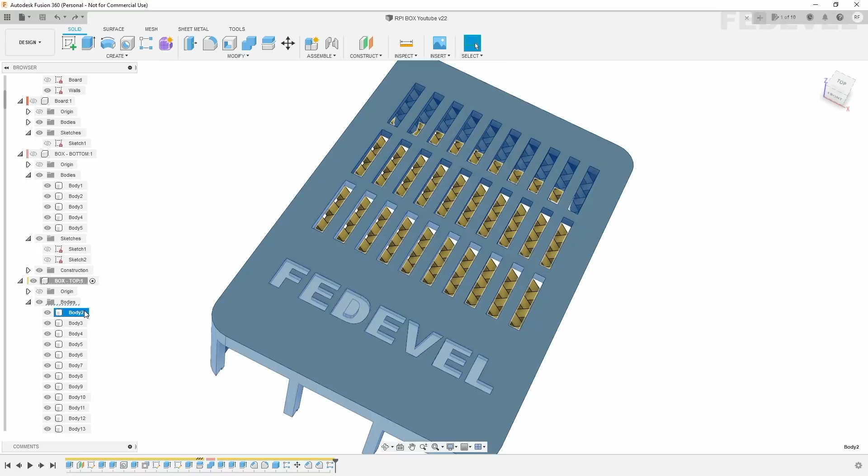Let's have a look. Okay, perfect. I'm going to create a directory or group of all these small bodies, because it's kind of a mess here in this list. This is the big body of the top part of our box, and all these other are the small bodies we have just created.

So I'm going to use right click here, new group, and I'm going to call it ribs. I'm going to move all these small bodies by selecting the first one, pressing shift, and selecting the last one, then drag and drop all these bodies to this group ribs. It's a little bit nicer and easier to work with these many bodies later if we would need.

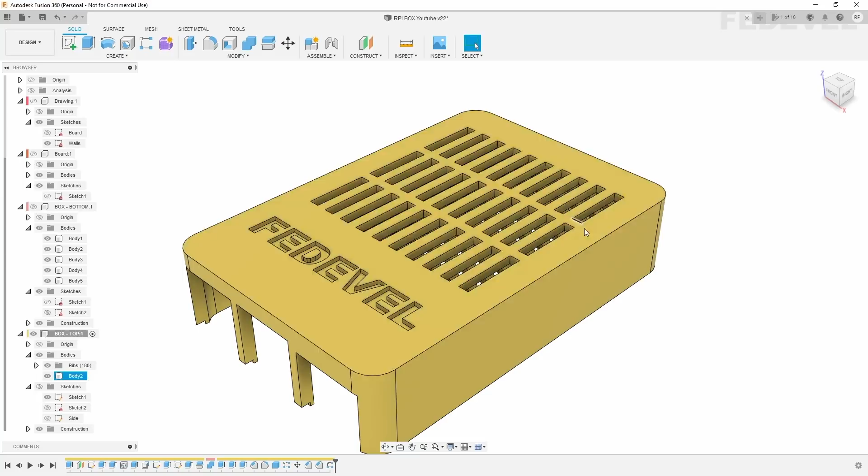We are going to remove these old ribs. What I would like to do is work with this top sketch. I'm going to name it and make it visible, hide these bodies, and edit this sketch. Right click, edit. I'm going to use this 2-point rectangle and draw it like this, because we would like a simple way to select all the ribs. Escape, finish sketch.

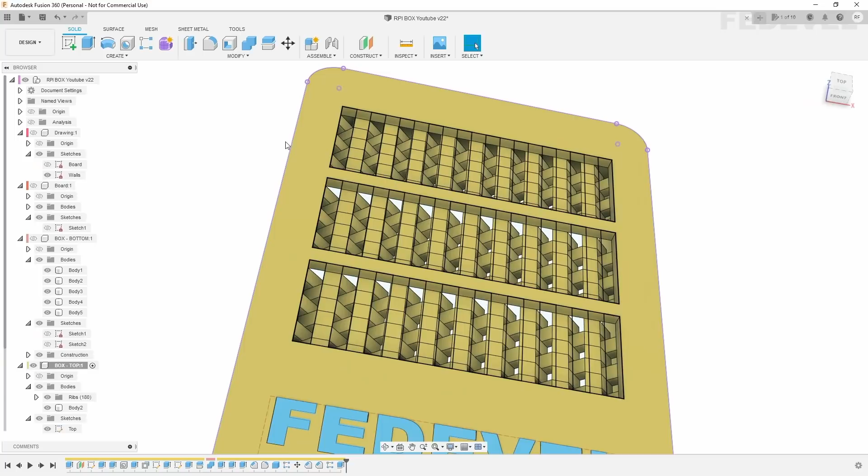Select top, select all the old ribs, use the extrude feature, and extrude up to the bottom of our box. Left click here. Be sure the operation is set to cut. And basically what we did is remove all the old ribs. I'm going to hide this so you can see it better.

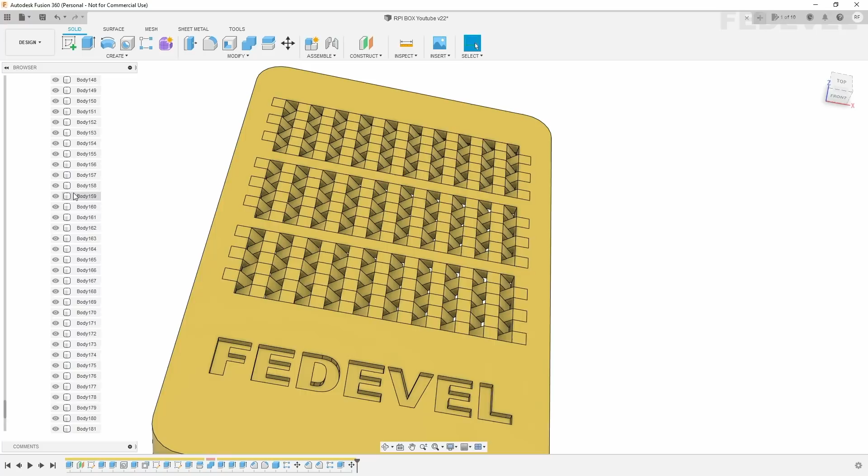Now what we need to do is move up these new ribs. So I'm going to use the move command, work with bodies, and select all the ribs. Click on the first one, press and hold shift, click on the last one, and we would like to move them from this point up to this point. Press OK, and I'm going to hide this again like this.

Our box is finished, so I'm going to 3D print this. I'm going to use export, select STL, and call it like this. Now just wait until it finishes the export.

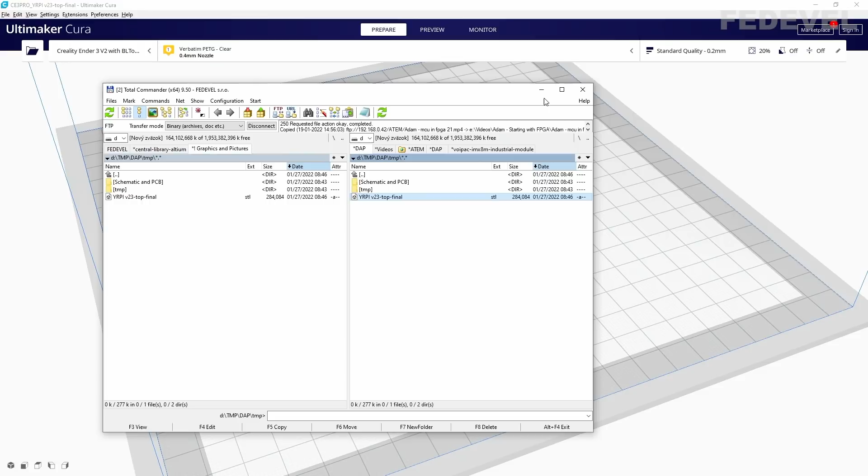I'm going to open the Cura software, find the location of the export, and drag and drop it here. Now select - I would like to 3D print it like this. Right click, center, slice, and just save it to your SD card.

Go back to Fusion 360, close this, disable top, enable bottom, disable sketches, enable bodies, make this active. Okay, export STL. I'm going to call it like this, and export.

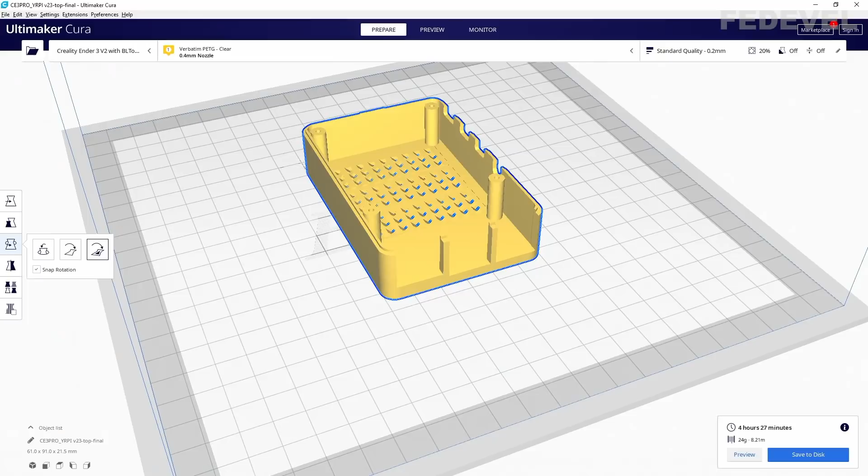Go to Cura, File, new project, yes. Open the location of the export, drag and drop it here, select it, right click, center, slice, save it to the SD card and 3D print it.

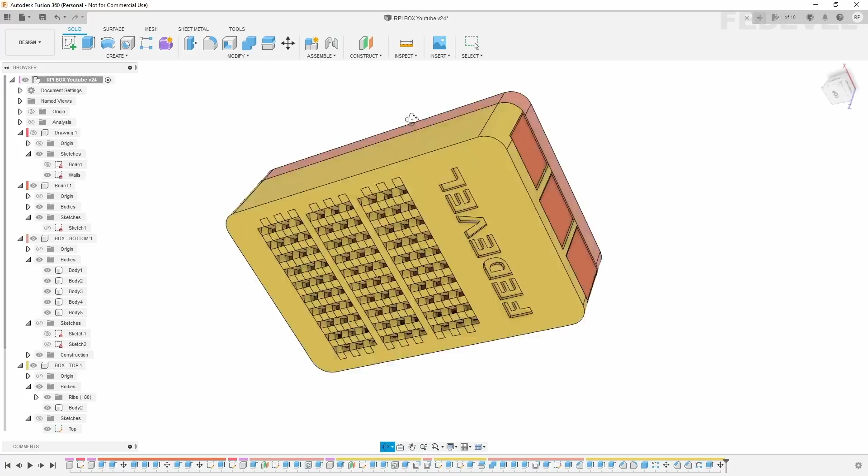And this is how our finished box looks. I'm going to make the whole project active, disable drawing, enable board, enable bottom, enable top, and this is how it looks. If you like, you can disable the board, so this is just the box.